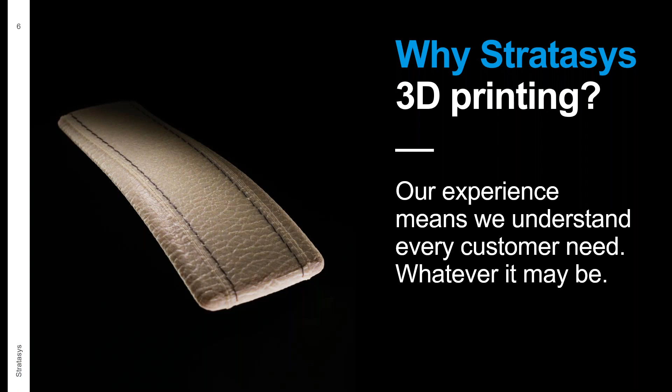So why Stratasys 3D printing? If you have to have a question, it means, well, Stratasys has, as I mentioned, 3+ decades of experience to understand what customer needs are. Based on customer needs, there have been innovations in terms of materials, technologies. So today we have platforms starting as office shared systems that could work with multiple industrial based materials. Whole lot to talk about.

So well, a brief introduction in terms about additive versus subtractive manufacturing. As you could see the animation, additive is to add layer upon layer materials, and opposite to the subtractive technique.

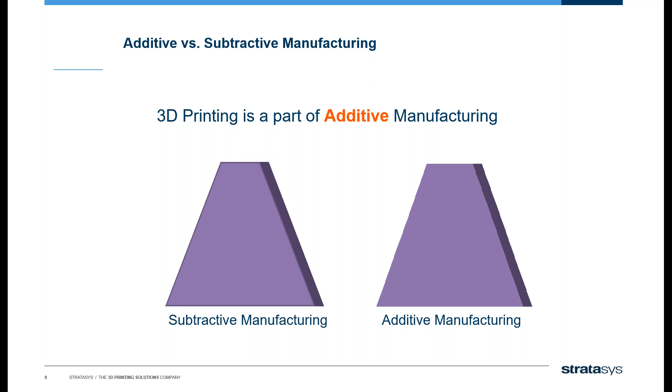Now Stratasys, this is an introductory video for you all to understand more in terms about what these Stratasys additive manufacturing technologies across different platforms could address vertical needs.

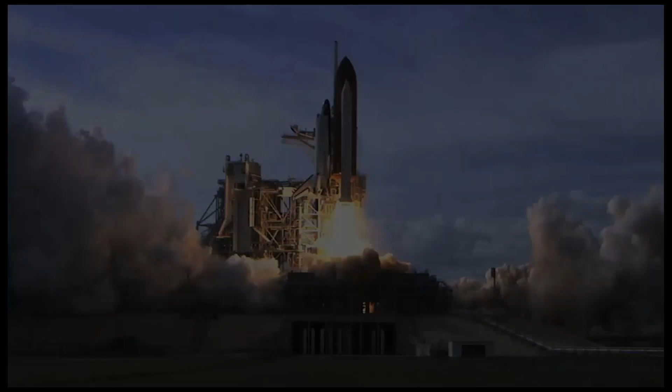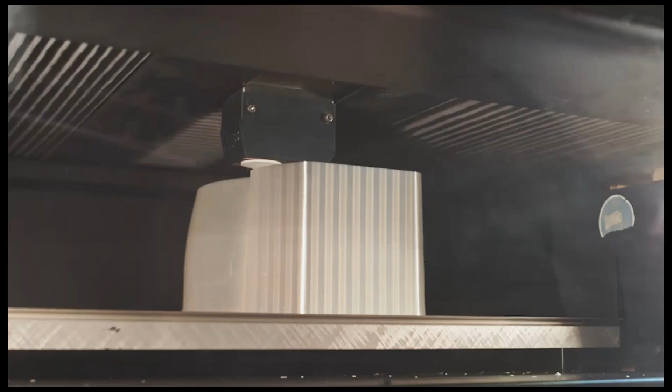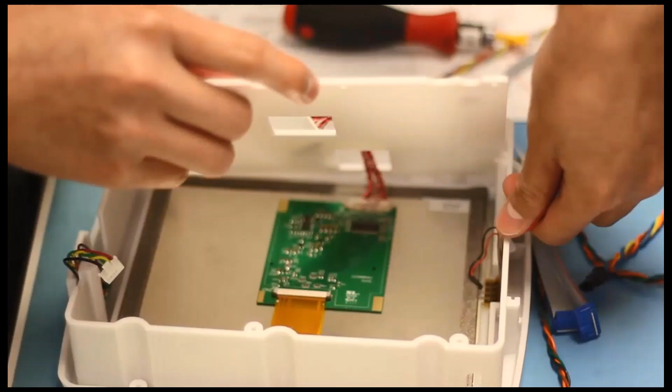Stratasys is shaping the world around us. From 3D printed rapid prototypes and design freedom to manufacturing innovation and production-ready solutions. We believe that what starts with a spark of an idea can now become reality. We see opportunities all around. The products, solutions, and services being developed within our walls today are changing the way things will be imagined, designed, and made tomorrow. Stratasys 3D printing solutions allows us to tap into the unlimited imagination and potential within each of us, helping designers, engineers, and manufacturers transform their capabilities and accelerate their progress across virtually every industry.

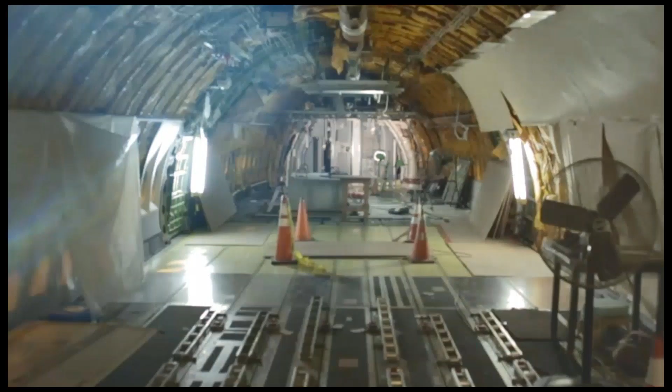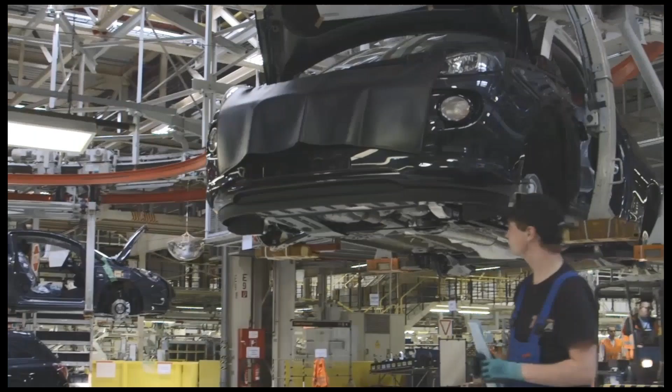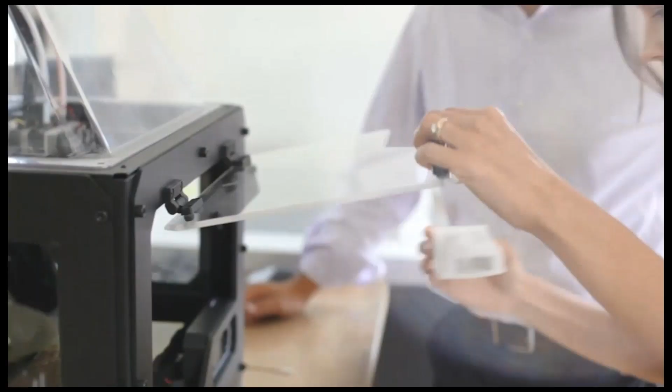Stratasys is shaping young hearts, planes with purpose, helping explore the next frontier, accelerating progress, manufacturing earth-friendly efficient designs, and delivering power and energy to the world. Stratasys empowers the dreamers to dream, inventors to invent, doctors to heal, and industry to grow. We are shaping innovation, creativity, discovery, education, imagination, and the possibilities of tomorrow. Stratasys, the 3D printing solutions company.

So while Stratasys as a 3D printing solutions company, when you have to focus on what the advantages over subtractive manufacturing is, yes, subtractive is good for high volume production, right? And you also have the wide range of materials to work with. And with those two advantages today for any consumer appliance manufacturing, you rely upon mass production.

But we also need to take into account some of the disadvantages. So the advantages are good once when you start machining your molds or when you have to machine a part. It takes quite a lot of time. You require work holding fixtures, special tooling, so on and so forth. Now designs have to definitely be manufacturable, only then subtractive could support. Or else you'll have the risk of not being able to have a completed part if your designs are not manufacturable. It is unlike with 3D printing or additive manufacturing.

And more importantly, in 3D printing, it is the opposite. You need not have to worry about lightweight parts. You would be able to have lattice structures, filigree structures, internal sparse fills in order to achieve lightweighting in manufacturing, but without compromising on the part's strength or its functionality.

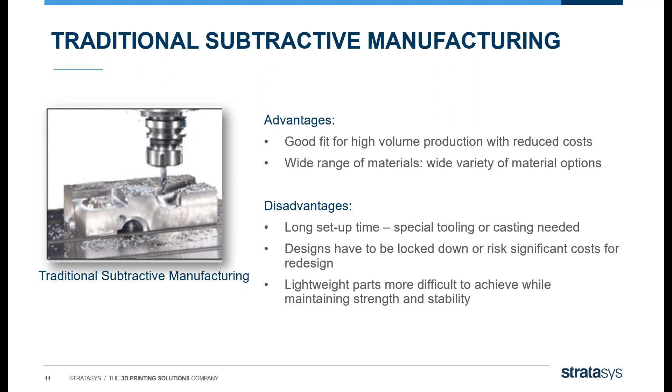So the additive advantages, if you're going to look at unlimited design freedom, first to begin with, design freedom. Designers can design to their heart's content. There's no limitation in terms about design for manufacturing. Manufacture any design, however complex it is. You would be able to integrate multiple components together and try to realize consolidated part designs that can be printed, which is unlike to be achieved in subtractive process.

And you also have a flexible supply chain. You need not have to look at tooling when you're going to have limited numbers of batch quantities that needs to be manufactured.

Whether it is casting or managing any inventory, it works very well with additive manufacturing. But yes, there are a few disadvantages as well. Today, there is a limitation in terms of the materials.

When you look at material limitations, it becomes a challenge for end product realization specific to a product's performance. However, there are rapid tooling and other means that could address the shortcoming of materials. But there is no compromise when it comes to traditional production manufacturing processes.

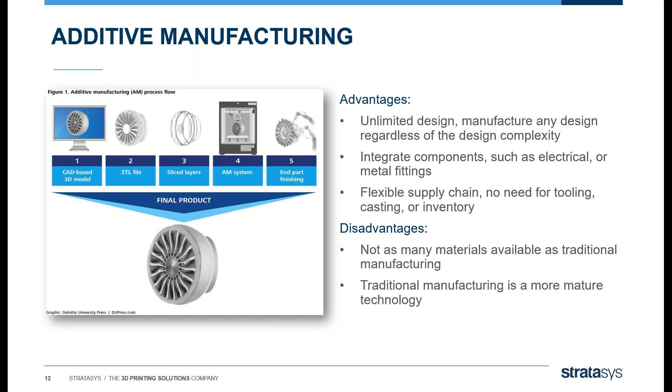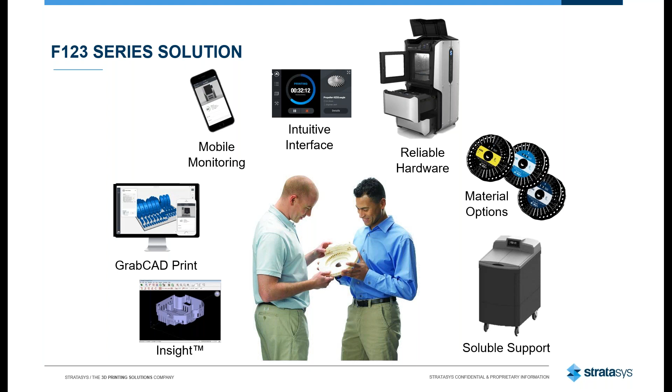So these are systems that are unparalleled with performance and productivity. Whether it is design ideas as prototypes or for engineering your products to the next level, you have the highest quality, reliability, versatility, ease of use,

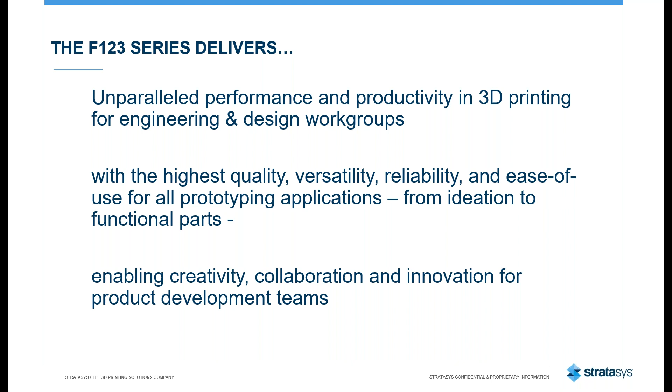and more importantly, from ideas to realizing functional parts. If you're going to ideate your designs, if you're going to change based on the outcomes, you'll have a better design that goes into productivity. So for creators, for creative ideas that need physical evaluations, an ideal cost-effective multi-material technology, the choice of selecting from the multiple industrial grades of thermoplastics that are on offer - you can pick and choose any one material with which you can work, and you can change the material if you're going from concept realization to functional prototyping. All that happens in quick turnaround time.

So the market messaging is that we have exceptional value from these 3D printers, and that's exactly where Stratasys scores over. From introducing the FDM technology, today we have 5 different offerings. It's very easy to work with these printers. You have software today that can read your native CAD files. No more do you need to worry about STL, the triangulations for better surface finish, and so on.

And these are highly performance-based materials available today, even on office-shared systems. Remember, these office-shared systems are office friendly. They're pretty quiet. They don't need to be manned. You submit for print and let the printer do its job. That's the factor of reliability from Stratasys.

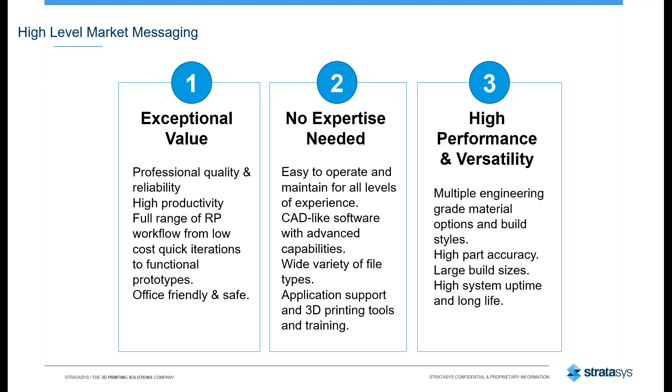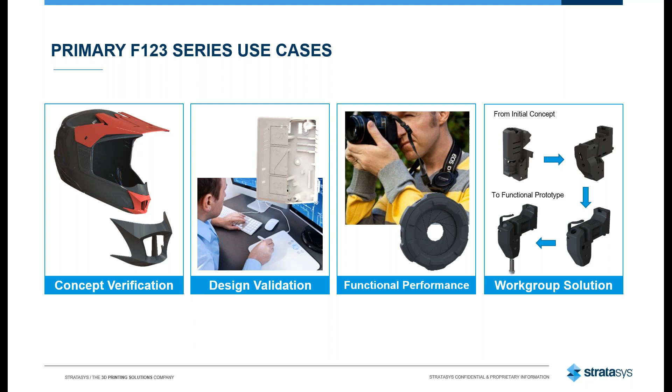Some quick use case studies on the office-shared systems when it comes to consumer goods, consumer appliances, etc. Concept verification, design validation, functional performance, or whether you have to use your work group to check on each of their design ideas so that the best design can go on to a product.

Here is a case study from a product design firm for a motocross helmet. It's a venting component that needs to be printed. Given the complexity of its surfaces and with the versatility of working with ABS and ASA, the pain points are addressed so very quickly and efficiently. That's exactly where it gives creative ideas that can be fine-tuned, that can be ideated, and the best designs are taken into the next level of manufacturing.

Very similarly, in consumer electronics, we have a smart home switch, and this is a housing which has got small, critical, and highly challenging features. Not easy for any manufacturing methodology to support realizing a physical part. Given the complexity of the design, mold manufacturing is also very cumbersome. It's going to take quite a lot of time and effort, but with the low-end desktop or office-shared systems, you have the PC-ABS combination, which has been used in realizing this output, wherein these electronic housings are highly accurate with complex geometries that could address product assembly and functional evaluations.

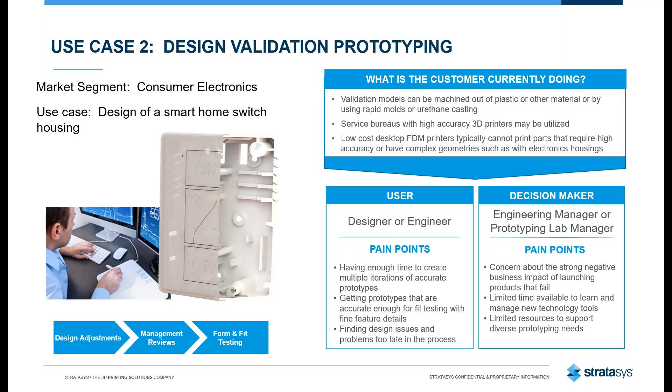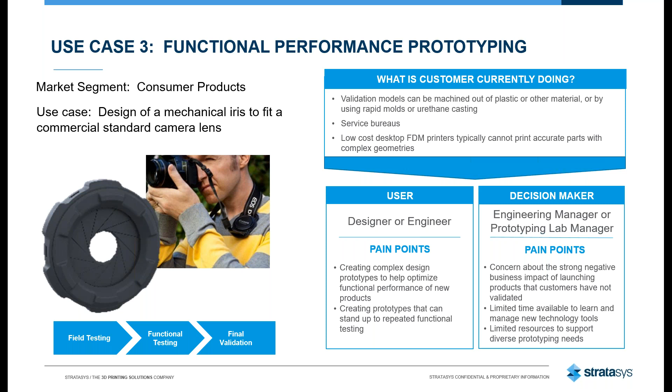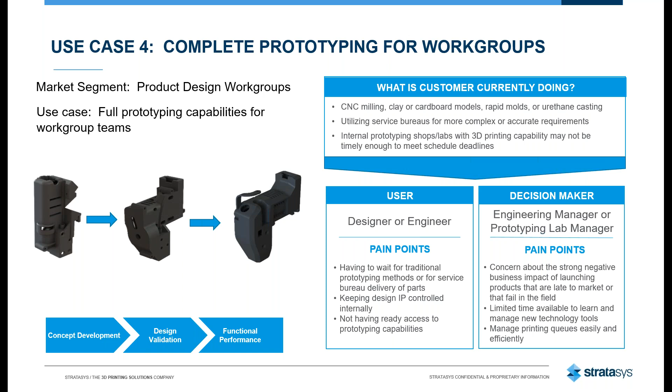So for work groups, you begin with the first set of design, alpha and beta designs, and then you fine tune your designs for the work group to enable better product designs. And not least, with the office-shared systems, you also have TPU, thermoplastic urethane, so that you can make flexible parts. That's to give a brief summary about what the FDM office-shared systems can offer.

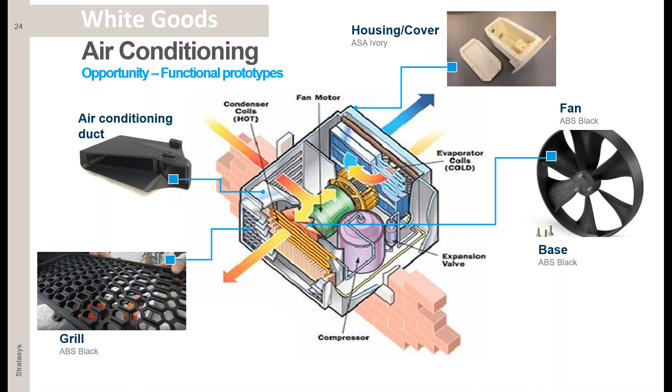But let us now focus more on large parts. When it comes to consumer appliances, white goods, air conditioning parts, these are highly critical, highly complex geometries. Whether you look at the grill, the air conditioning duct, the fan, or the housing covers, all these could be very well addressed with these Stratasys technologies.

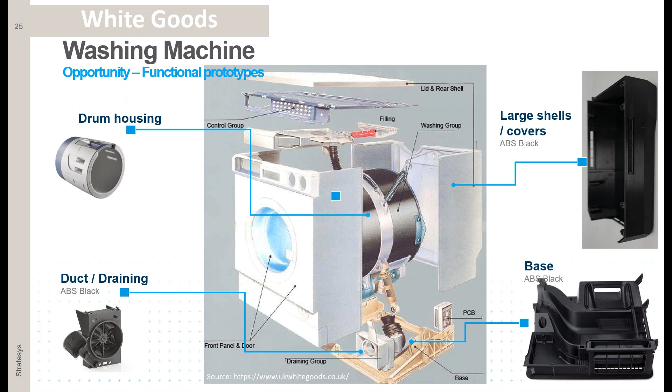This is added value, highly valuable output in terms of consumer goods manufacturing companies. Because given the complexity and the quick turnaround time, and more importantly, as a single-step process, it saves quite a lot of outsourcing, vendor development to achieve that, or struggling with CNC manufacturers to machine that part from a huge block of plastic.

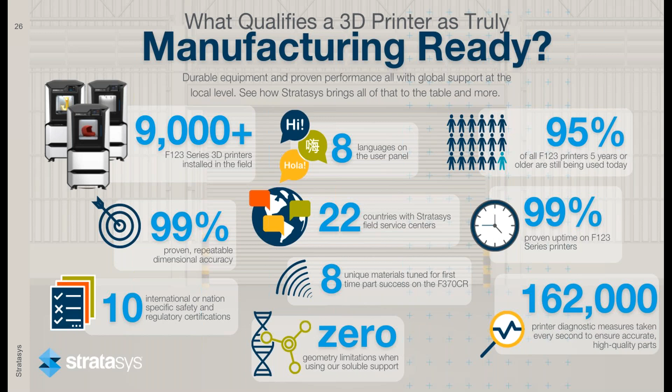Stratasys manufactures systems from Minnesota in the US and from Rehovot in Israel, and offers field service centers as well as engineers who have been trained at the headquarters for well over 22+ countries.

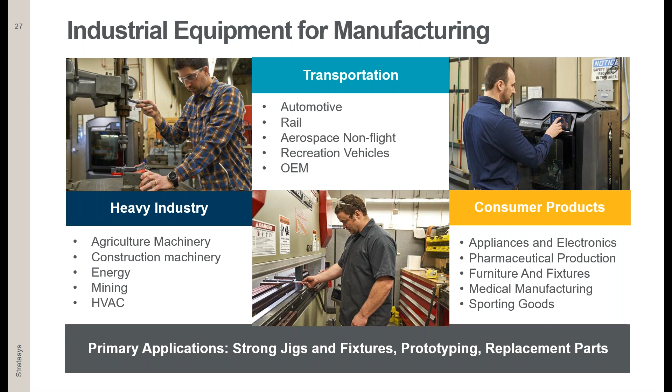Let us go back to the base component of the washing machine. The overall size is close to 600 millimeters in length. Now look at this particular part's geometry—it has highly complex thin wall sections, undercuts, not easy to be molded. There are overhang features, which we call undercuts, that cannot be manufactured by traditional processes unless you have split inserts with complex molding processes. You would not be able to achieve it.

But all these criticalities can be achieved in a single step, and this has been achieved on the F770 system. We'll go back to the F770 system once we complete with the F series.

Today, the F series also includes carbon reinforced systems. You can work with nylon, carbon fiber reinforced materials, so you can print much stronger, stiffer parts—not just ABS, ASA, or PC-ABS combinations or TPUs. You also have carbon reinforced materials to work with.

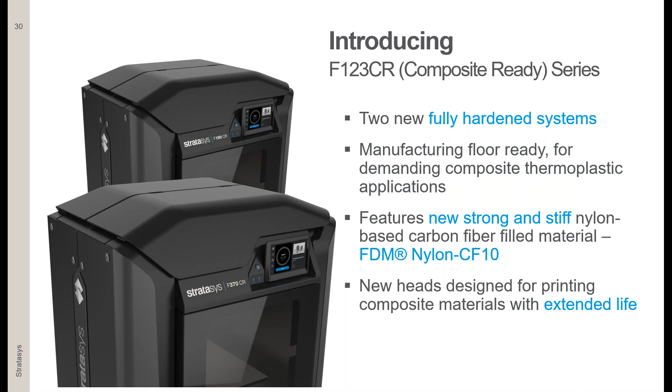While we talk about composite-ready systems, we have the F370 and the F190, and these are very strong platforms, ready for any thermoplastic applications infused with composites. These materials supplied by Stratasys today can take on any major application requirements for making strong, durable jigs and fixtures, metal forming tooling, work holding devices for CNC machining, and assembly fixtures that bear quite a lot of weight in automotive applications, as well as for consumer goods.

More importantly, one point to understand well is that it's a complementing technology, as I mentioned before—additive manufacturing complements subtractive techniques. So today, as a supplementing technology, where possible, we can supplement metal manufacturing of fixtures, end-use applications. Traditionally, wherever metal has been used, these have been replaced with high-strength 3D printed composite parts. These composite materials, the CR series carbon reinforced materials, can address and meet the manufacturing demands and application requirements of various industries.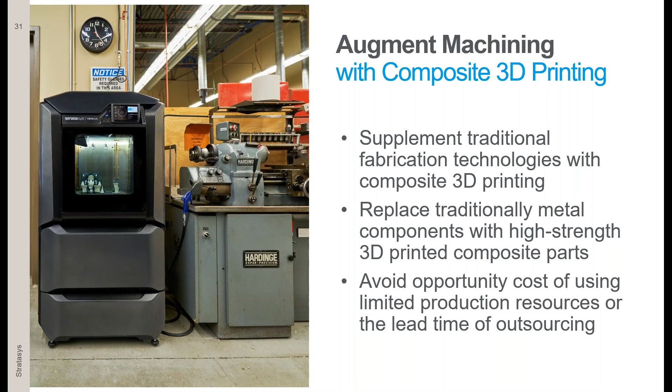This could enable cost saving, time saving, and that's very crucial. Not just adopting, but how does it serve—does it address your pain areas? Yes, it could save time. You have a simplified process of single-step manufacturing, unlike subtractive, where for every given operation you need different manufacturing machines and technologies, and don't have them all under a single roof. You would be able to meet your deadlines and stay within your budgets.

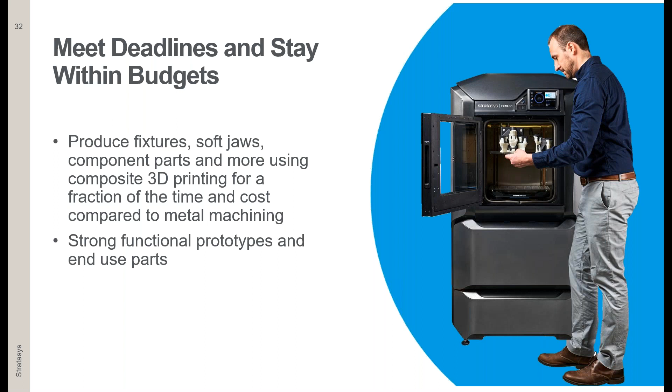That's exactly where you will have strong functional prototypes, whether you call them fixtures, soft jaws, or even component parts, with composite materials that could protect your production schedule. If your toolings are getting delayed, if you've got downtime in your tool manufacturing or in your production line, all these are well addressed with the CR printers, carbon reinforced printers.

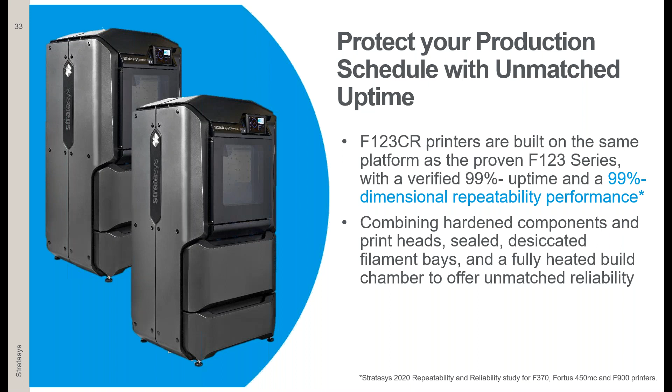And these are hardened systems—verified time and again, with very high uptime. Dimensional repeatability and the factor of durability qualify these printers to make end-use production parts for consumer applications or consumer appliance manufacturing. And here is the large printer we talked about, the F770 for the base.

Here you have a print envelope size of 1000 millimeters, 1 meter by 610 millimeters by 610 millimeters—we call it 610 millimeters on the Y and Z axis, along with 1000 millimeters on the X. So it's the longest X-axis in the Stratasys product portfolio, and more importantly, here you can work with both ABS and ASA.

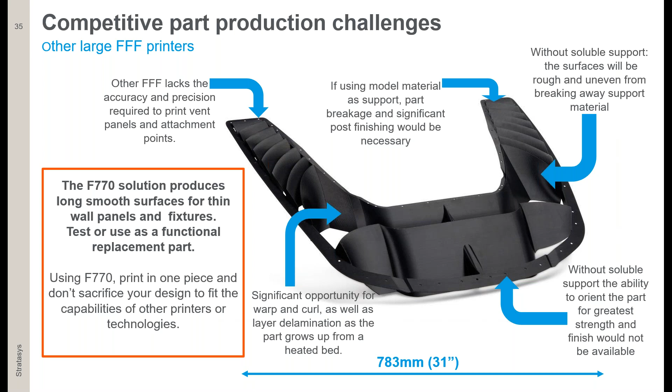This particular component is 783 millimeters in length. In comparison to other fused filament fabrication technologies, given the complexity of the geometry, only with soluble support and the repeatable quality output from Stratasys do you get such thin walls and functional parts manufactured in a quick turnaround time. Even with other technologies, you have to have multiple splits to print this part, but with Stratasys, the F770 can qualify to print it as a single piece without having to section it.

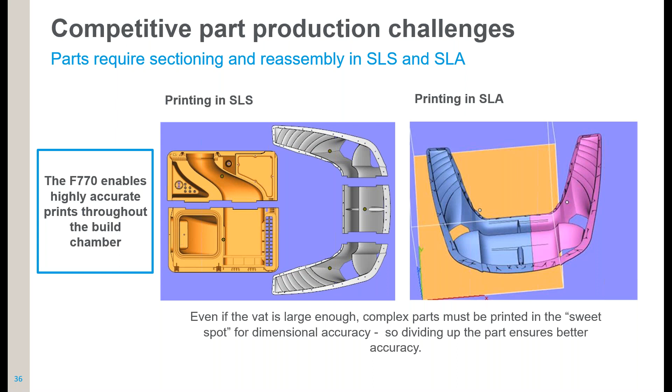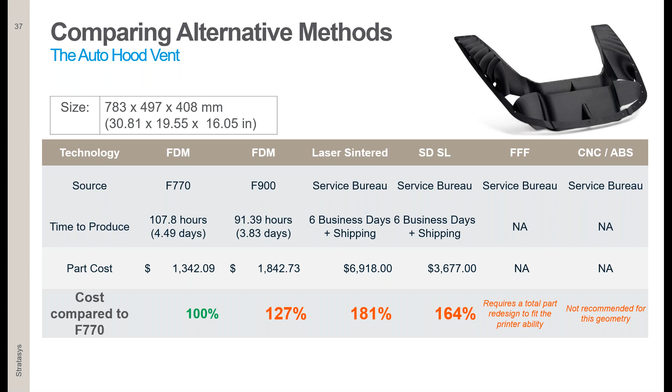You also see the cost comparison with major competitive technologies: powder bed fusion, triple F, and CNC. CNC is not applicable here given the complexity of the geometry, and the same goes for this component, a prototype and injection molded large part.

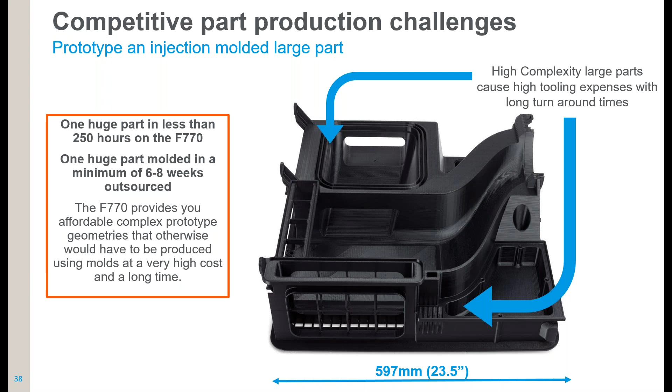These are some of the challenges they faced at the very beginning of product development. How could they achieve this? How can they overcome it, simplify their designs, and get better product qualification in terms of sub-assemblies? All this is very well addressed only with large format printing on the FDM F770 printer.

Look at traditional machining, where parts need to be sectioned, repositioned, or the geometry simplified. These call for additional tooling manufacturing costs, multiple setups, multiple fixtures, and operator time, and you'll need a large CNC to machine them. If you look at the cost benefits of CNC machining such complex geometries against 3D printing, ideally Stratasys FDM is the cheapest.

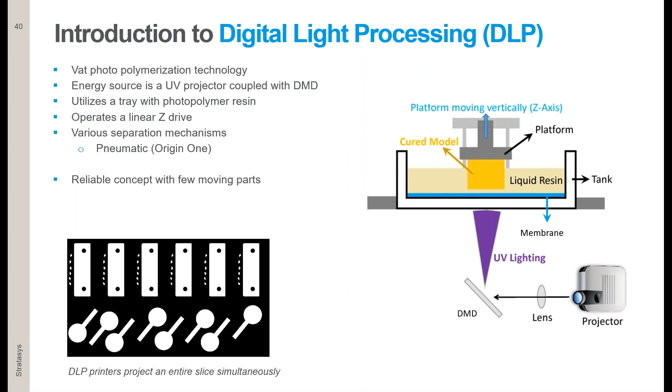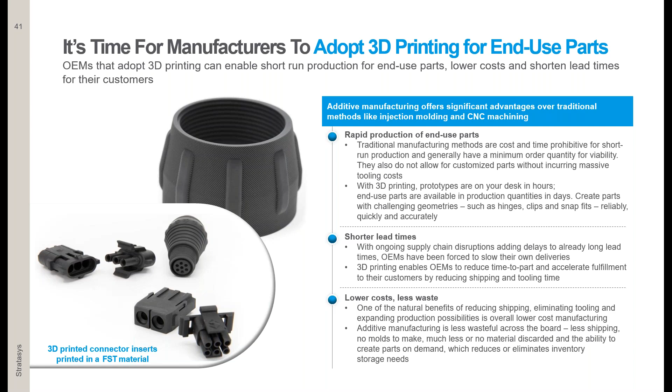A brief overview of DLP. This is a technology for batch quantity, production-based outputs. What is so unique? It's a resin-based system that can qualify parts with the majority of surfaces addressed at an injection molded finish quality. It also offers material versatility for functional outcomes. Quite a lot of manufacturers, to manufacture small parts with complex geometries, adopt DLP, Stratasys Origin One, and P3 as a technology for end-use part manufacturing.

With end-use part manufacturing, I'd reiterate you get excellent surface finish and tough, robust prints. That's because industry majors in resin manufacturing, like Henkel Loctite, BASF Plastics, Evonik, and Covestro, are supporting Stratasys in developing new resin formulations that qualify for flame, smoke, and toxicity certifications. Some materials can withstand up to 300 degrees Celsius. With such high-end materials, you're able to print robust parts usable as production parts on your product lines. That's exactly why we call the P3 a programmable photopolymerization technology.

You can tightly control geometry features and dimensional accuracy, with excellent surface finish and higher throughput. Industries benefit by having end-use part production that can achieve hundreds and thousands of parts with the DLP process.

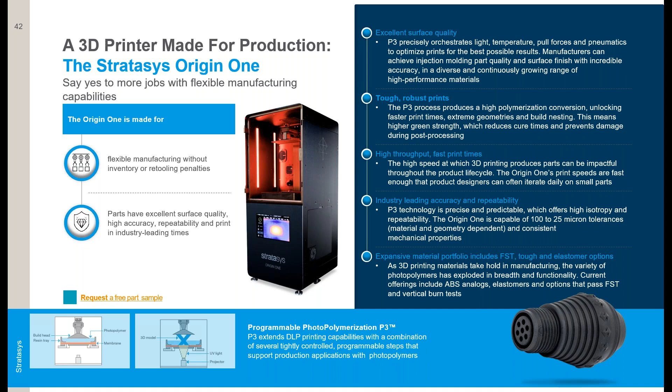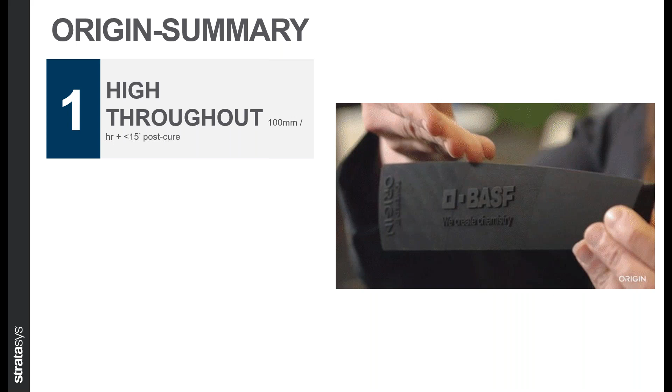In summary, it's an inverted process of printing, unlike FDM, PolyJet, or powder bed fusion technologies. The DLP process is inverted. You see parts suspended as they enter a vat containing resin material. This gives very high throughput and, more importantly, access to a range of high performance materials.

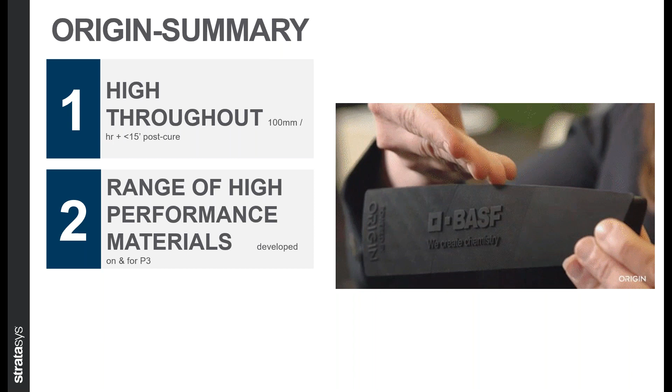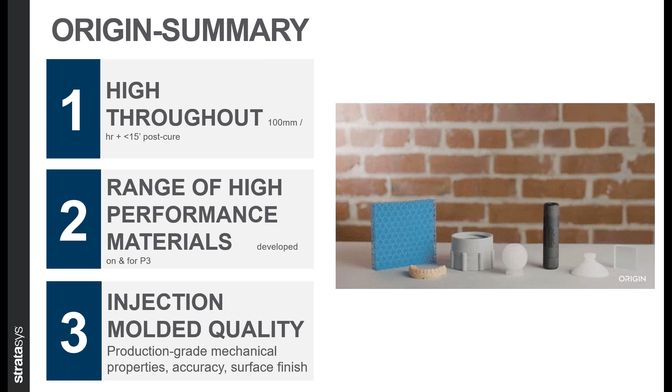This is the point that needs to be taken into consideration. These are some aspects unique only to Stratasys DLP printing, delivering injection molded part quality. That's exactly how the DLP process supports industry majors, with quite a lot of them using DLP for good batch quantity manufacturing.

To summarize on FDM, the applications are very varied. With a polymer-based tool, you're able to form metal, whether aluminum, stainless steel, brass, copper, or titanium. You can choose to print in ABS, polycarbonate, or Ultem, different materials available on the Stratasys production series machines.

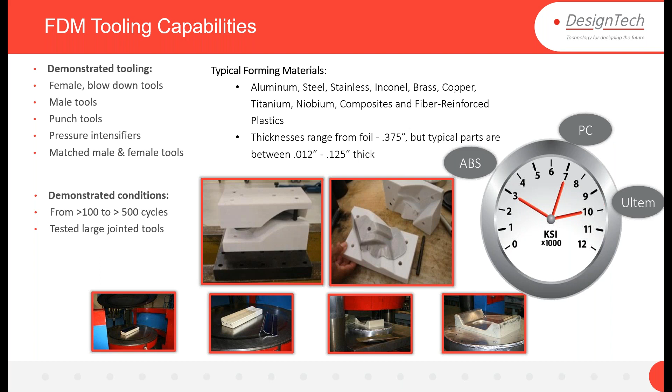Ultem is a material that can qualify, with even one small cubic inch, to bear compressive loads of 10,000 pounds. Today, Ultem 1010 can bear more than 12,000 pounds of compressive load for forming applications.

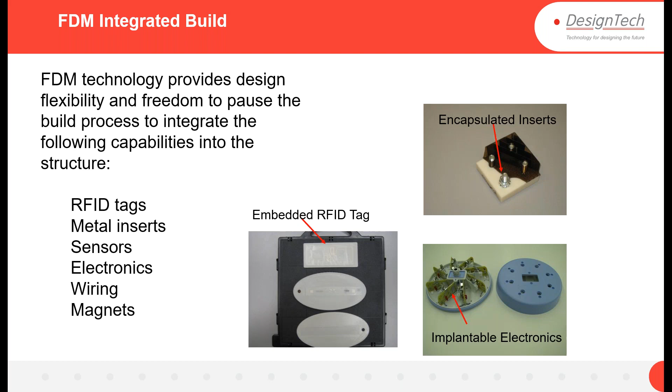To summarize the uniqueness of FDM: soluble cores allow non-linear geometries to be achieved without a split line using soluble support, enabling things like carbon fiber components for lightweighting. An important aspect of Stratasys FDM technology is the benefit of integrated build, where you can have inserts placed during printing.

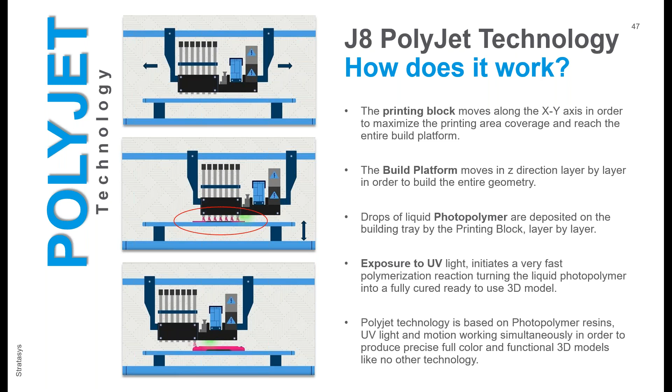Now let me summarize the final technology, the PolyJet technology. It works with the principle of a moving print head, called a printing block, that constitutes multiple heads, and more importantly, the UV lamps, a wiper blade, a vacuum suction unit, etc. This is a snapshot of the J series printers we're going to look into.

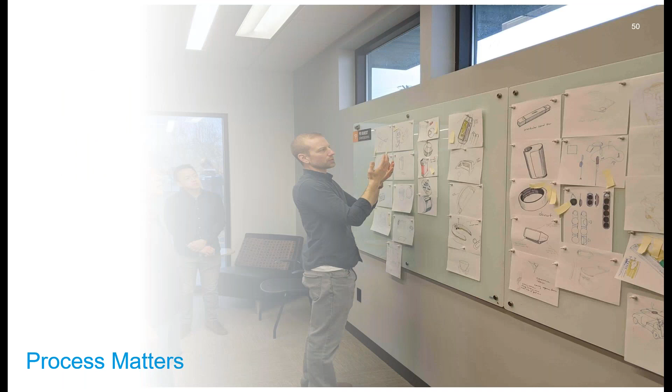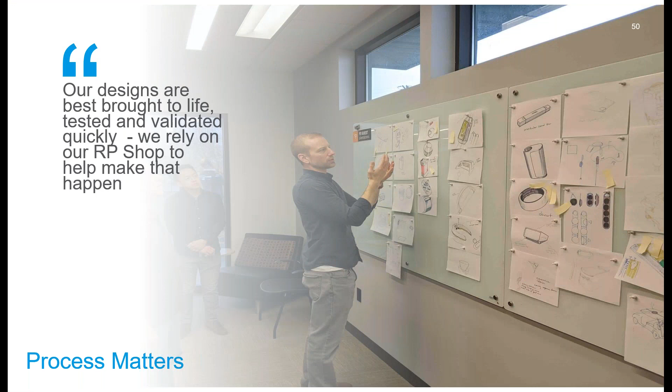What is so very important for any designer, for any industry, is that process matters. What you sketch, your designs, have to be brought to life, and that can only happen with Stratasys PolyJet technology. Whether it's a conceptual shape, detailed design, or the final design, it's an end-to-end technology from concept to the final design.

You would be able to directly reproduce what you see on your creative computer screens with all those colors, text, and prints, with accuracy of colors and labels, without any manual intervention, with very minimal post-processing, achieved in a single print. That's where we are going to look at quite a lot of consumer durables, consumer goods, consumer appliances having the benefit of working with PolyJet as a technology.

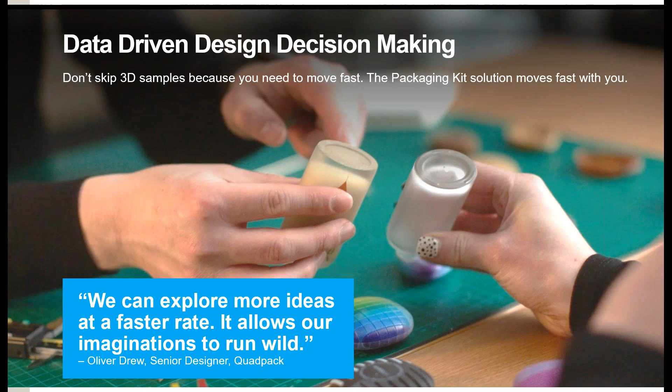Now, as you get to see, quite a lot of companies were having to work with packaging solutions through third-party vendors. They didn't have the benefit of having the complete packaging kit available. Here, PolyJet offers you the complete kit, and that's exactly where the visual samples were called high fidelity models that could combine your 3D product design with all the 2D labeling, the colors, the graphics, in a single print.

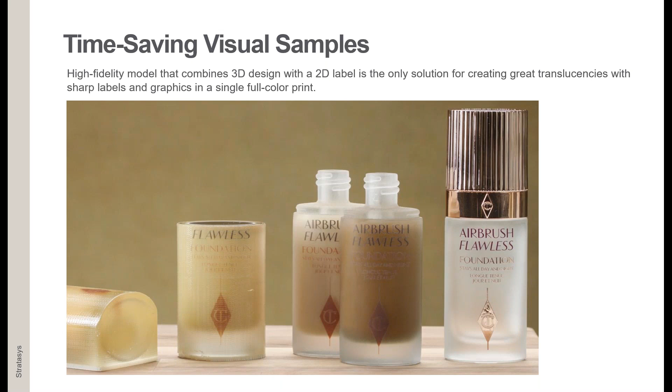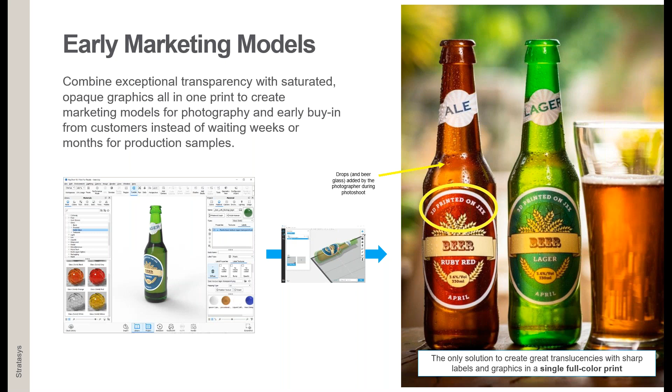And these could be used as a marketing model for industries - that's exactly where the benefit is. There, except for those water drops for the photographer shoot, rest everything is single shot printing. You'll be able to use a PolyJet printer to realize the final product design with colors, text, clear exteriors, clear material, opaque colors, gradients of colors - no limitation here.

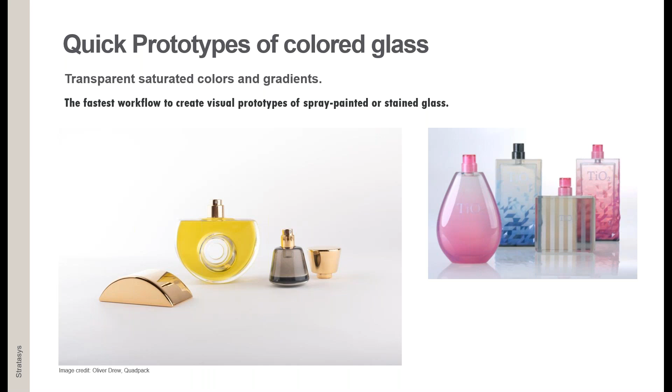There you see the gradients of colors on the right extreme when we talk about colored glass, transparent saturated colors and gradients. Now, how does this give enablement to quite a lot of industry? By now you would have realized, and we'll also get to see very quickly a video which talks about how these digital files are getting transformed as physical outcomes that could be tabled as high fidelity models.

Let's hear what Tony has to talk about, and take us through getting to realize the benefit of what he's holding on his left hand, which is a single material output, whereas with the PolyJet J series printer, the color J series printer, he has the final outcome as a single step process.

Kinetic Vision is an R&D consulting firm that's focused on developing and integrating advanced technology to drive innovation. There are sales and marketing going on every day on shelf at retail through packaging, and that packaging has to impact that specific consumer personally. When you're developing a product around packaging, it's critical that the end decision maker hold the final product in their hands.

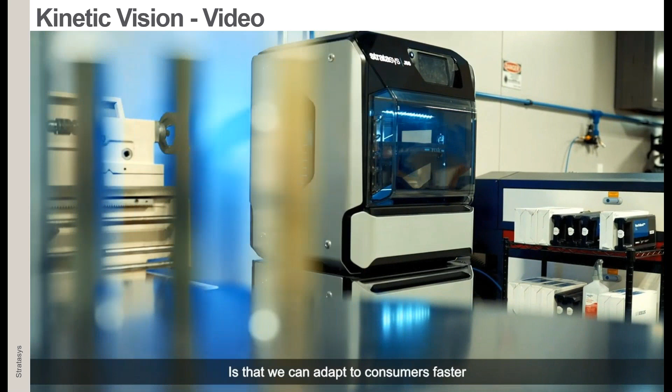And that's where we adapt to consumers faster and at a higher level than ever. By being able to have 3D printers available for the Kinetic Vision design team, we're able to shorten that design cycle. It's incredible, the impact of the J55 on our process. What we typically do is really amazing images or graphics, and we put that up on the wall, and then we let the consumers or the clients view it. However, with the J55, we can actually get there in just a few days to a place that is on the edge of reality, which is something we've never been able to do.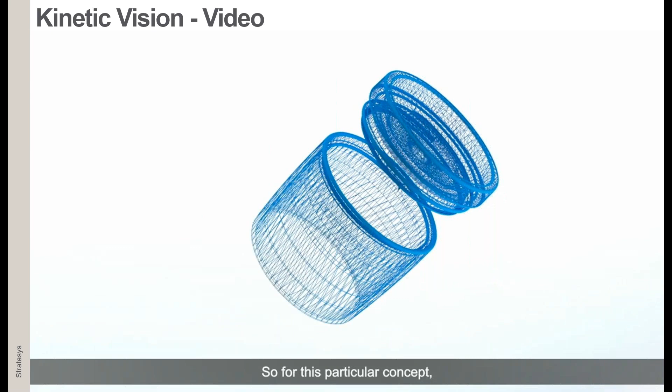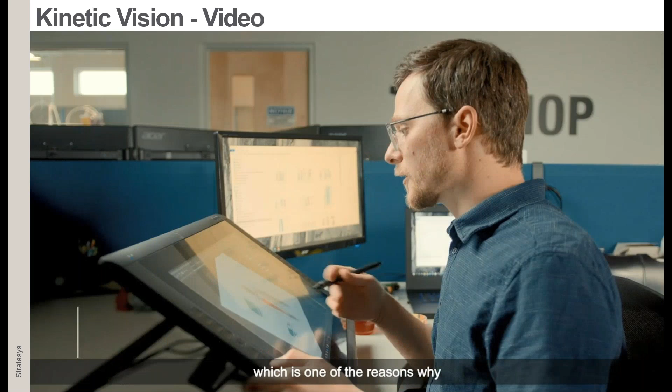So for this particular concept, we were doing a design sprint. We wanted to see what would actually happen if we added the J55 to that process. So we decided to do a retail drink, and we developed the brand, the graphics, and the structure all within a 2-week period. Not only are the graphics intricate and colorful, but we're playing with opaque materials and transparent materials, which is one of the reasons we're leveraging the J55 printer, because we can take advantage of all its unique features to really bring those ideas to life.

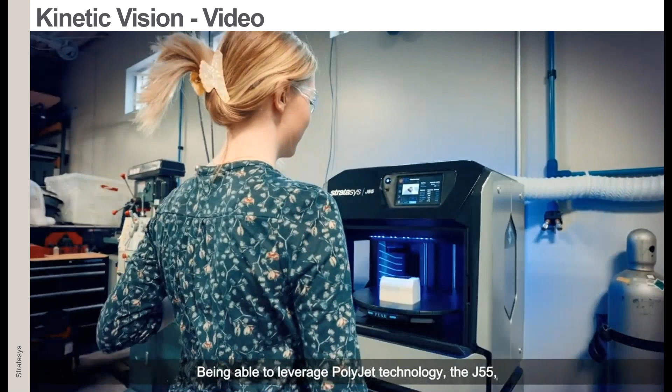So we have alternate lids that we've created, and you can see that actually intertwines and works. There's actually liquid printed in this, so you're seeing the color that the passion tea would actually be. It's printing completely transparent and colored transparent at the same time, as well as opaques. So if we were showing this to a client, we can give them every detail of the product itself, which is absolutely incredible. Being able to leverage PolyJet technology, the J55, we're able to jump past some of the firms that are not adopting that technology.

We sent this to a customer, and they called us and said, hey, where can we actually buy this product? Because it looks amazing. We said, no, that product doesn't even exist, that's just the product we created. And they were stunned because of the J55 print, they thought it was actually real.

We give our customers an advantage. They're able to take their product to market faster, develop better products, be the best on shelf. To be able to hand this to a client and watch their eyes light up, their mouth open up, and say, oh my goodness, how did you do this? How long did this take? That's their response, it's amazing. And so the impact for them is incredible, and obviously all of that reflects back on us.

So there you go with Kinetic Vision. We would definitely vouch to see that as what we intend to have as a final high fidelity model.

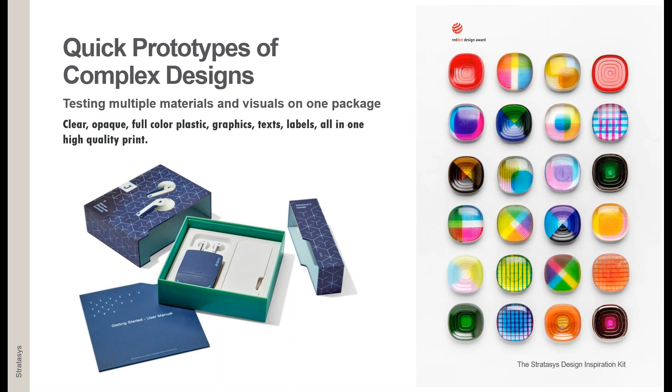Today we have the support of the Stratasys PolyJet J series printers that gives enablement for having full color graphics, text, labels, everything incorporated in a single print. And there you go, you have the design freedom, innovating in a crowded space. And that's exactly where cosmetic design companies and consumer goods manufacturing fit in. So whether you have all those details of graphics etched on the body, or wooden textures on the cap, all of them are compatible to be printed very quickly.

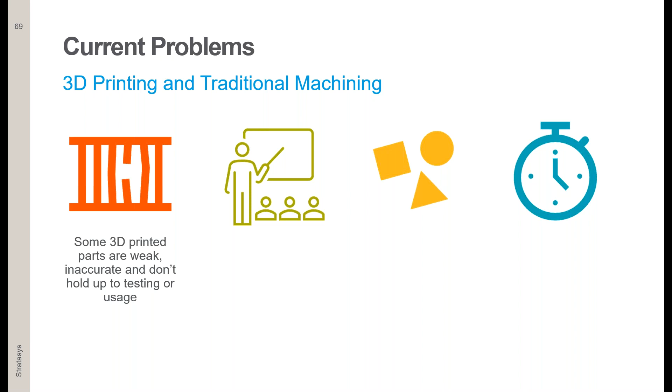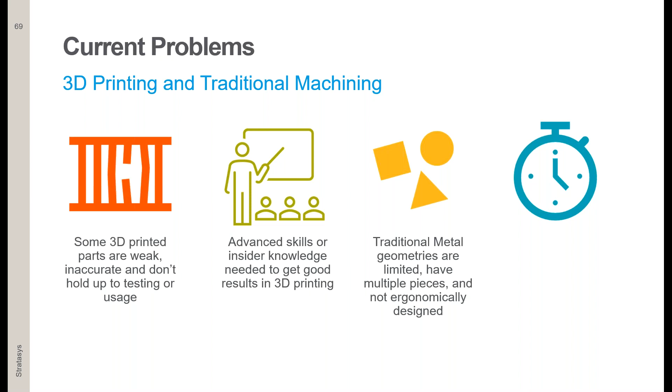So, current problems with 3D printing and traditional machining: some 3D printed parts are weak, and there are quite a lot of challenges when it comes to insider knowledge or training people on 3D printing. Traditional metal geometries are also very limited, and the time for metal machining is very high.

Now, what if there was the right 3D printing solution? You have high strength composite materials, as well as user-friendly software that supports intuitive functions that can be carried out without any specialized training. As a user-friendly platform, whether you're operating the printable files or operating the 3D printers, it becomes more user-friendly.

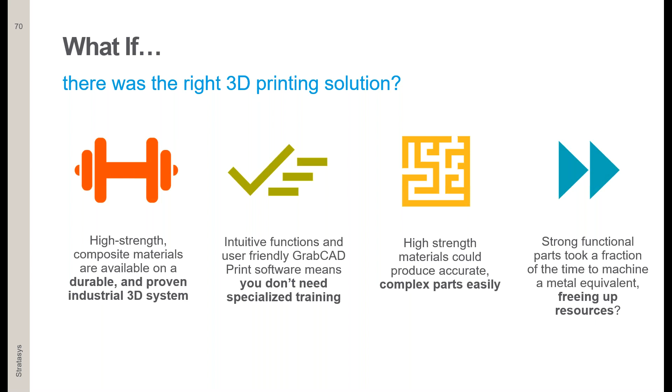High strength material means complex parts can be easily manufactured. More importantly, when you look at time, all that can be made in a fraction of the time compared to machining, which means you're freeing up quite a lot of resources to work on subsequent projects. So it's here now. You can definitely look at staying within budget and meeting your deadlines. This is exactly where the focus has to be.

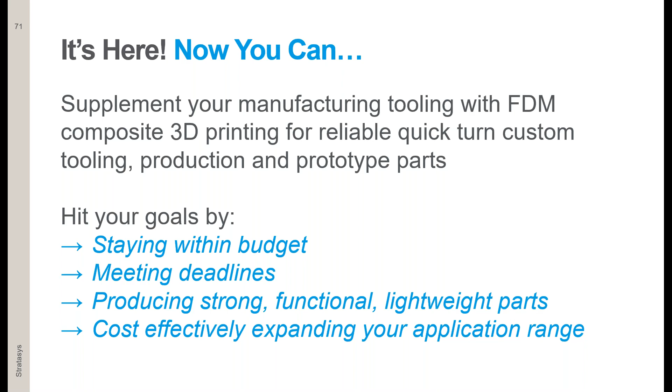Supplement all your manufacturing tooling with FDM composites when it comes to more durability, or with PolyJet when it comes to design creativity, and for batch quantity manufacturing you have DLP, SAF technology, and so on. That's exactly where all these consumer products, whether refrigerators, washing machines, vacuum cleaners and so on, benefit.

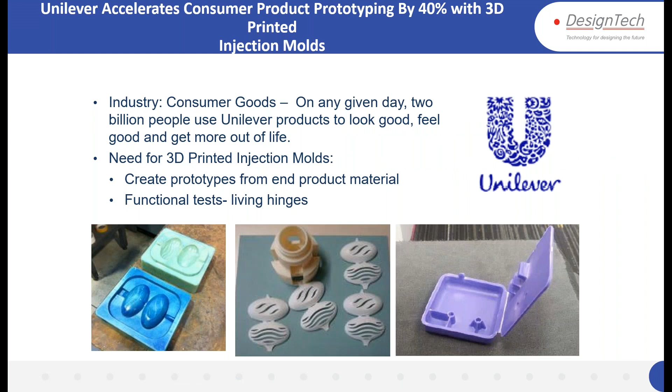Some of the listed names here: Unilever does quite a lot when it comes to consumer goods. Mahle, for their air cleaner, has been able to do the CFD analysis and not just stay with the analysis part of it. They wanted to physically try, print, and test it out, which they have been able to achieve.

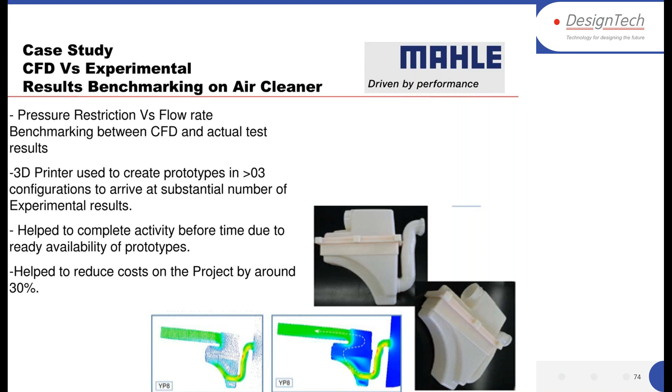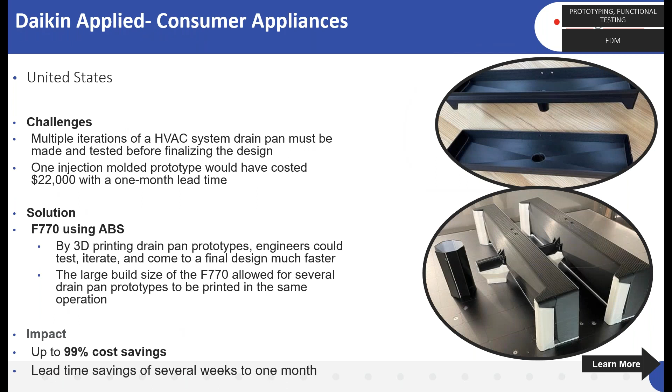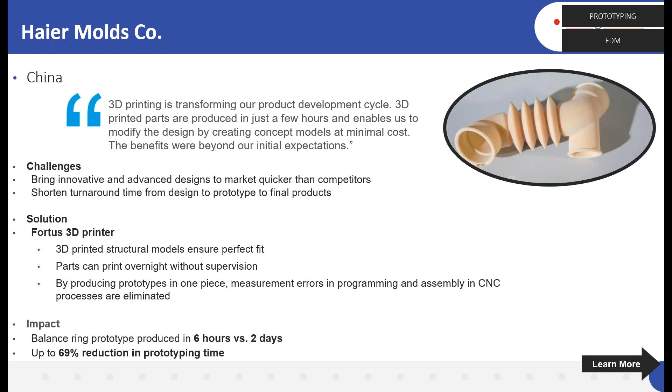Daikin Applied, again, for consumer appliances. There are certain critical components that can cost them very huge when it comes to injection molding. All these are well addressed by Haier Molds company for critical components and inter-assemblies that need to be made. It has only been possible with soluble cores and soluble support technology, which has enabled them to achieve such critical geometries and quick turnaround time.

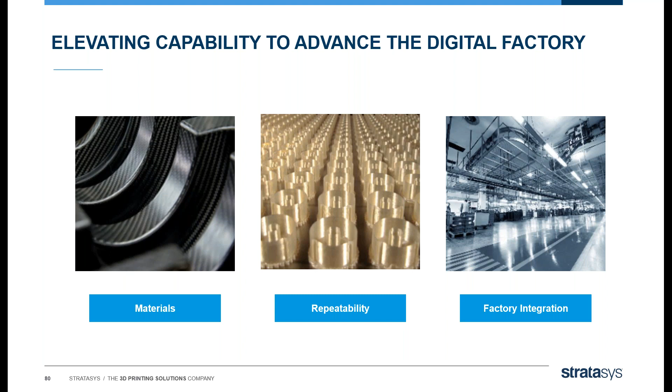So, to summarize, let's look at Stratasys technologies. They always elevate the capability. This elevation gives advancement for the right material choices and selection of technologies that could support, meaning you have materials and repetitive quality from Stratasys additive manufacturing platforms and technologies. So factory integration is possible. You can have additive manufacturing along with your traditional manufacturing machines to support, and wherever there is elevation in terms of time saving as well as reducing metal utilization or lightweighting your manufacturing, you can adopt and start working with Stratasys AM technologies.

So, I have come to the end of my presentation today on the subject of consumer appliances supported by Stratasys additive manufacturing technologies. You can also reach out to us on our social media pages, as well as our contact details and email, which will be shared as a PDF format later today evening once I complete this presentation, and you can reach out to us more.